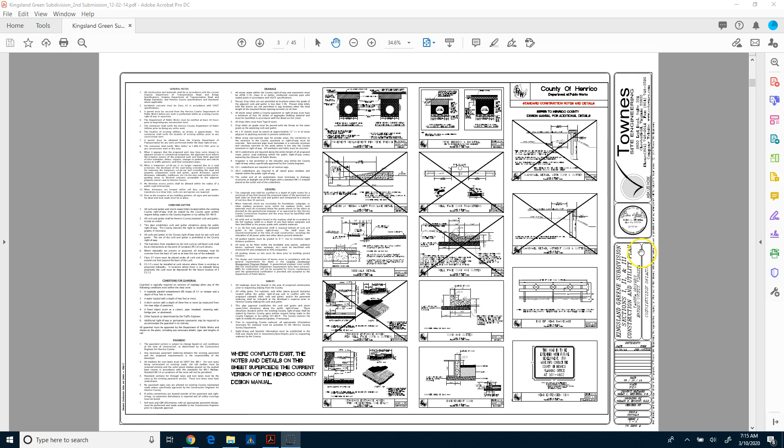Now the next few sheets in the set are the construction notes and details. If we zoom in, we can see we've got some general notes. It basically tells us some information about the construction materials, curb and gutter information, conditions for guardrail, and some grading notes.

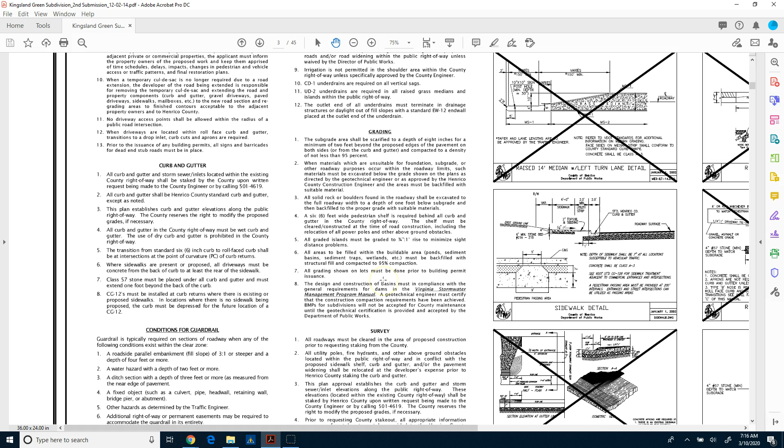All areas to be filled within buildable area ponds, sediments must be backfilled with a structural fill and compacted to 95% compaction, so you can see we have to put in certain information there. There's some survey data here, and then some bold notes that talk about what details on the sheet supersede

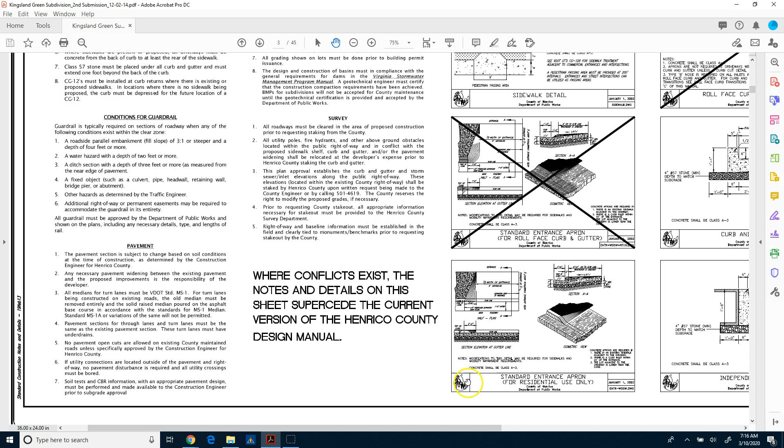the current version of the Henrico County design manual. So the county has its own design manual, and you can see that by these details here. They'll put out these details, and what these details do is depict how certain features need to be built. You can see the extras there that they're not using. A lot of times the engineers will have this sheet already pre-made, and they just drop it into a set of plans, then X out the ones that don't apply.

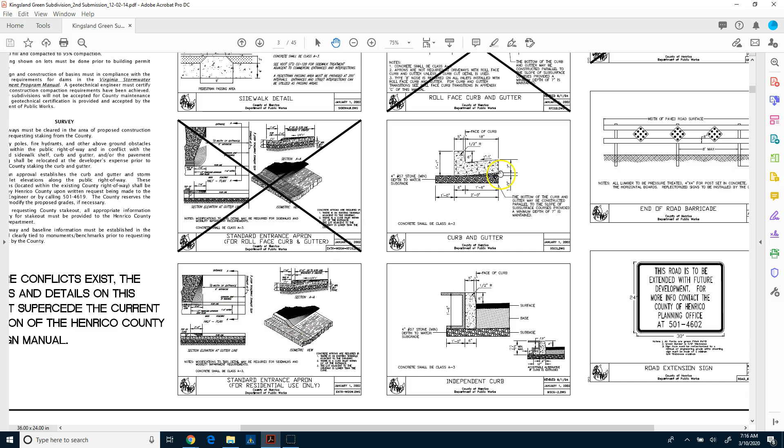So here is the standard entrance apron, showing the dimensions of how this apron should be built. Same thing here with the curb and gutter, so it's going to tell us we've got an 18-inch curb, looks like a 6-inch top there, and a 6-inch curb reveal, along with the bottom and stone information.

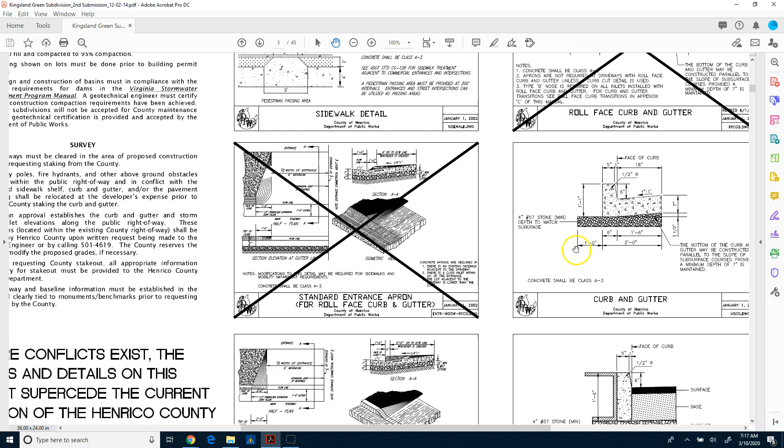You can see here that from the edge of pavement out to the back of curb, a foot past, is actually going to be where they cut out for their earthwork. So they're actually going to have to cut a foot back beyond the curb and gutter.

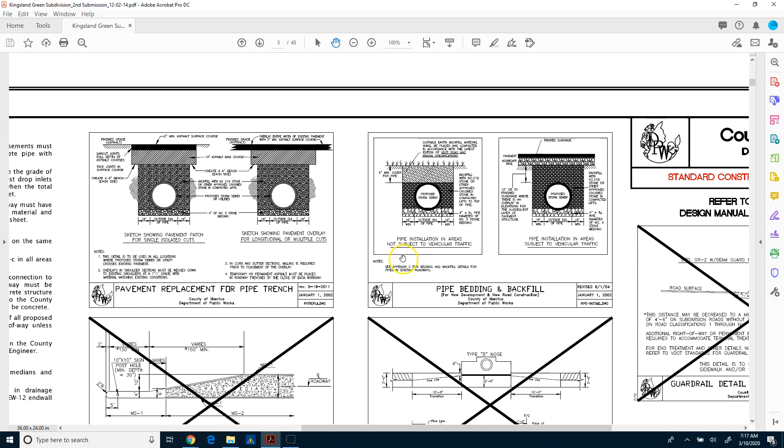This information here would be great in the utility module inside a business center. We'd be able to put this information in and create this trench, and then do a takeoff report that tells us how much material is going to be in each of the utilities, which we'll talk about later. Some other signage information goes into these plans too, but these are the details.

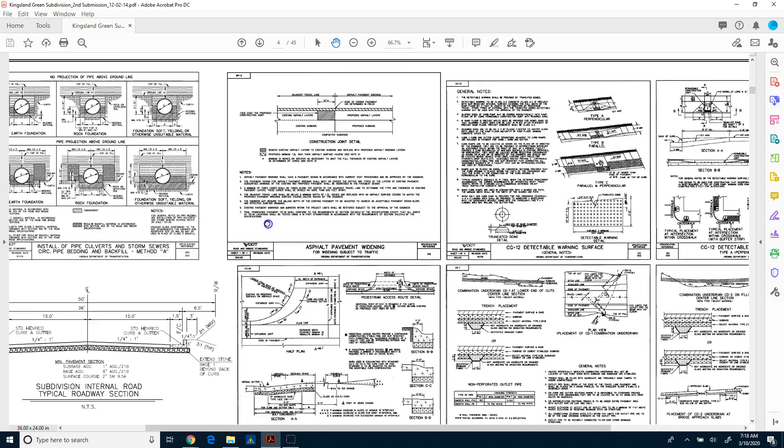If we go to the next page, you'll see there's some additional details. One of the pieces I want to point out on this page is the typical roadway. So I mentioned in the overall, we have the center line bearing and distance.

And on this page we actually have the road cross section, the typical cross section of the road. This tells us here's where the stone base is going to be, and the thickness of the base here is down here. So we're going to have a 6 inch sub base aggregate with a base of 8 inches and then a surface course of 2 inches.

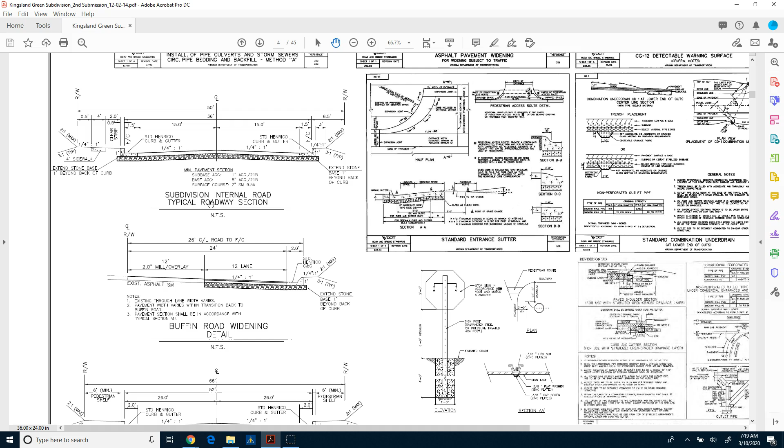So it shows us our cross slope and then our widths of the standard road with the curb and gutter as well. This information here is what we would use to build the road network. Down here is the widening for the entrance road, and then here is the road extension for this particular road. Each one of these sections is going to be used to build that portion of the road.

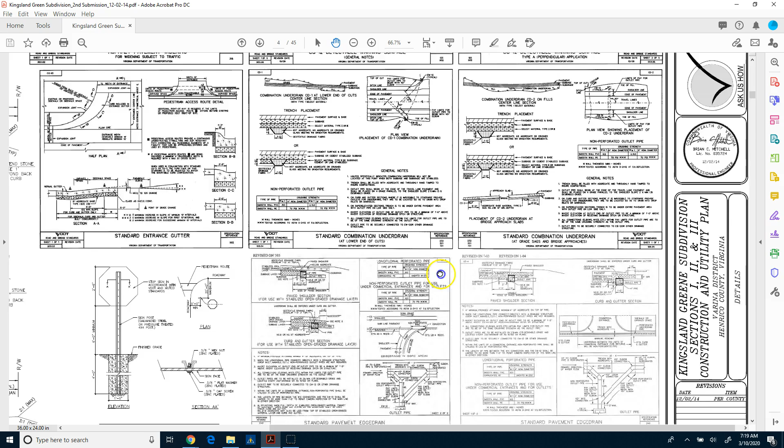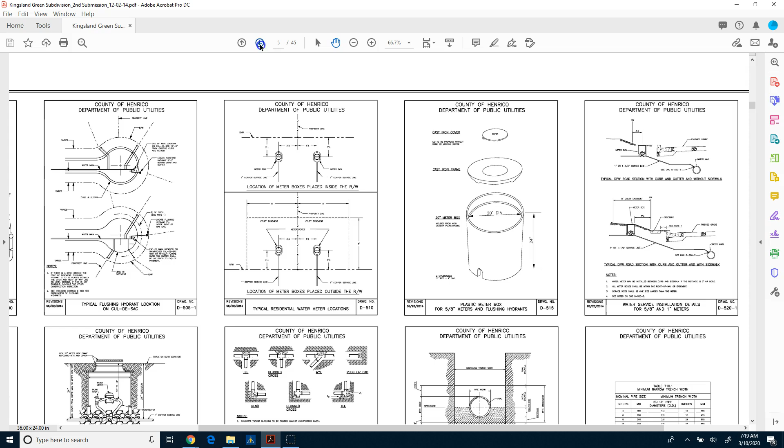Over here there's some stop sign information, some other details for under drain and the handicap ramps as well. If we go to the next page, you can see there's some storm sewer details for the manholes, so a lot of details that cover the utilities, like the water line, curb and gutter, water line, fire hydrants, and blocking of the water line. The next page again has more details depicting more of the utilities on that project, so a lot of information, a lot of details that can be extracted from this. A lot of this is for takeoff purposes.

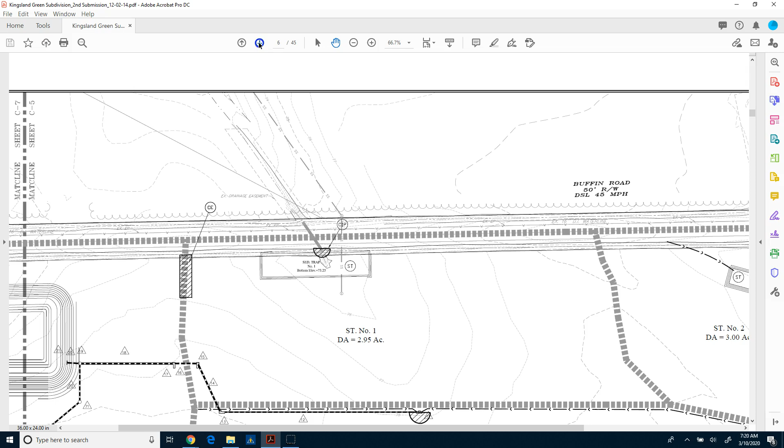And then we get into the next set of sheets, which will be the erosion control measures, and we'll talk about that next.